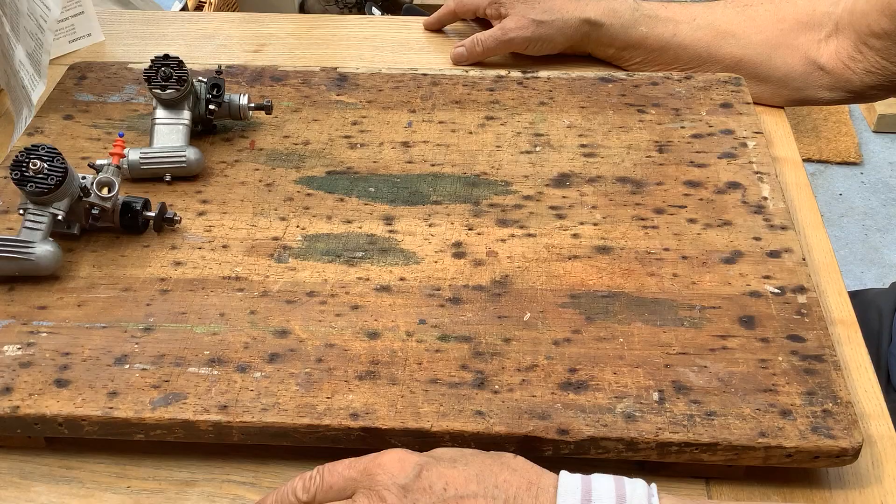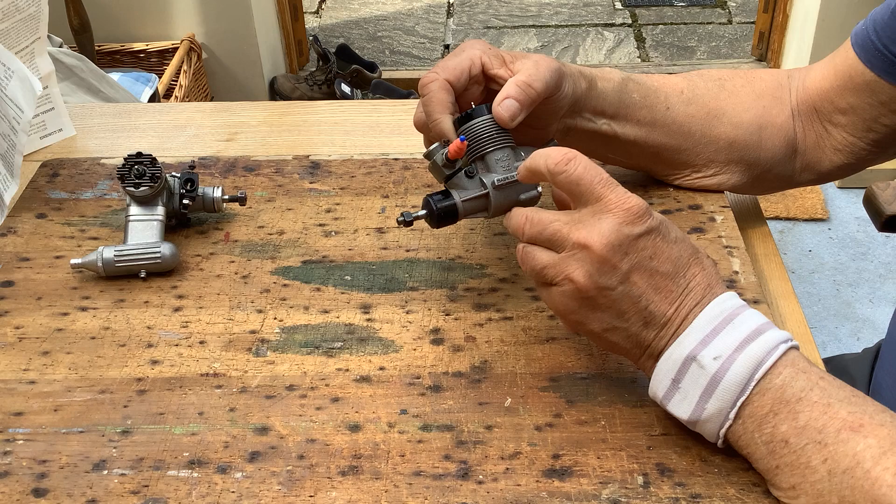First up we have an MDS metal doorstop, MDS 3.5cc, 0.2 cubic inch, made in Russia. Not very fashionable these days. Not much info about these engines in general, and in particular not much about this one. I guess it's Schnuerle ported, double race, big Venturi there, possibly with the original glow plug, which is an idler bar plug, if you can see that.

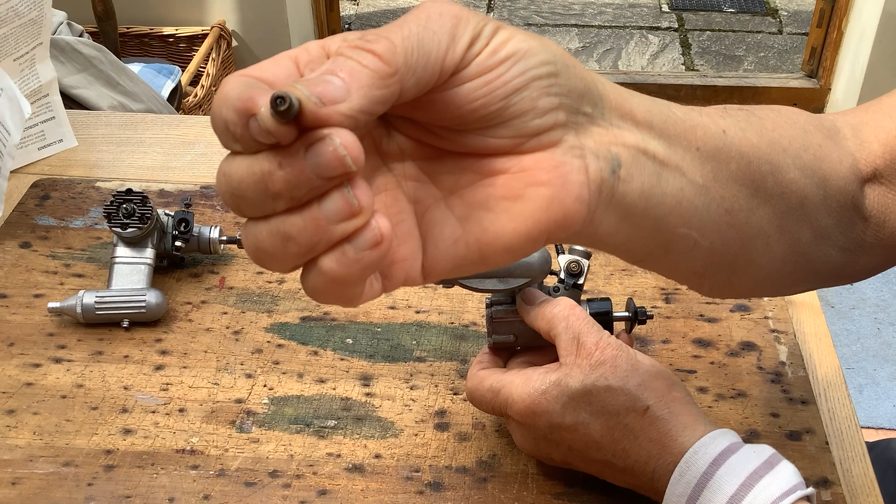No matter. It was a bit of a barn find off the old eBay. Didn't cost very much, and normally for these sorts of engines I would take them to bits and make sure they were clean, no crap inside. This one I couldn't. The cap heads were put on by Ludmilla up in Minsk with a 6-foot bar on her wrench. I think they're absolutely immovable. And I think the back plate, I won't even show you that, it's disgraceful, was put in with a hydraulic press, I think.

The observant amongst you will notice my patented needle valve. It came without one and that bit broke off. So a hat pin and an earplug stuck on there to give it some sort of seal. That pushed in, actually works.

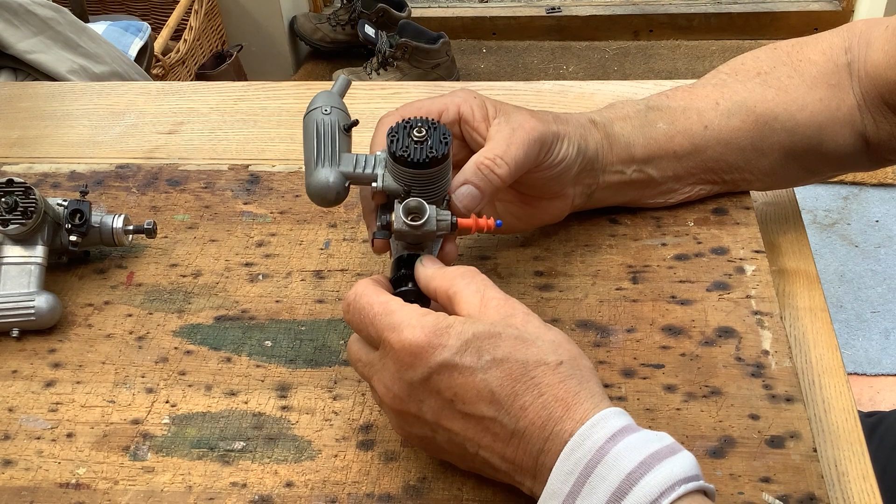It's pretty rich, but that's no bad thing because I think this engine has had very little use. The fits and bearings are very good, and it throttles on that fine, and in general I must be lucky because I've had 2 MDSs now and both of them have been very good, but it's agricultural.

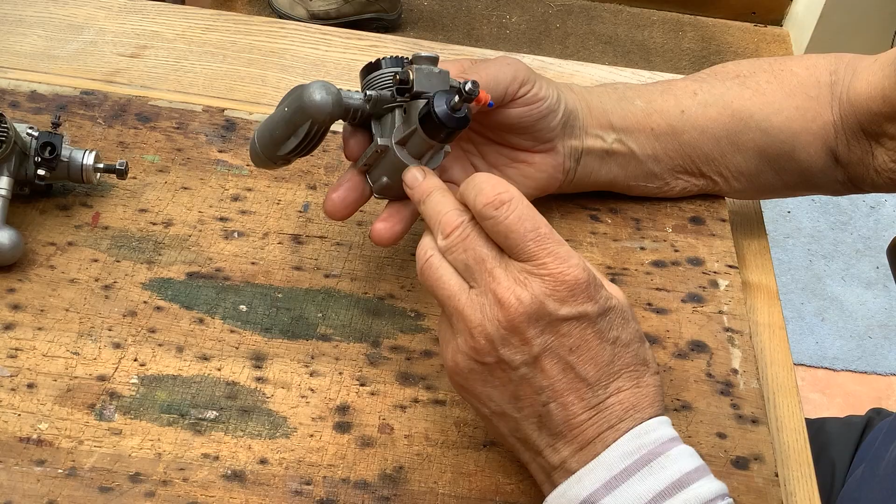I think there was one run on YouTube years ago by Wonderful Cat, and he said it's a bit agricultural but it runs fine, and he put it up for sale. I don't think this is the engine, but you never know. Anyway, let's call that chalk.

Saving the best till last, this is the cheese. It is an HB 25, 0.25 cubic inch, 4 cc's, H, Helmut B. Bernhardt. So this was made in Germany by Helmut Bernhardt, and these engines are quite rare now and very, very well made, I have to say.

Helmut Bernhardt, according to Peter Chinn, made optical instruments and decided to go into model engines, as you do. There is, believe it or not, a video on YouTube if you search for Helmut Bernhardt with a T on the end, and I think his son is fronting the video, and they're actually making orthopedic shoes. So where instruments led to shoes, I do not know, but this company, typical German family firm, employing a few people, started in the 1920s or 30s, I think.

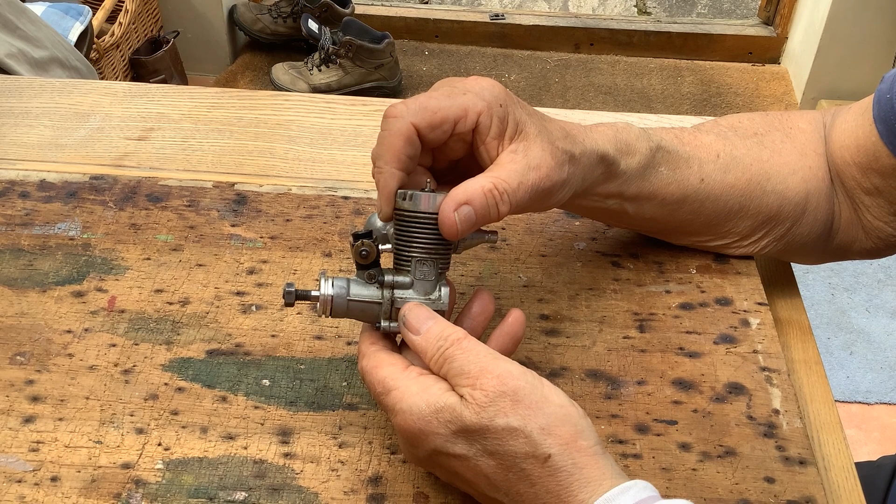Helmut decided to make engines, I think in the 70s, early 70s, and he teamed up with K&B in the States, and the person who makes these carburetors, Perry, and for a while he was making bits for them, and they then made bits for him, and they had something to do with Veco engines. But after that, I think all this is Helmut's make.

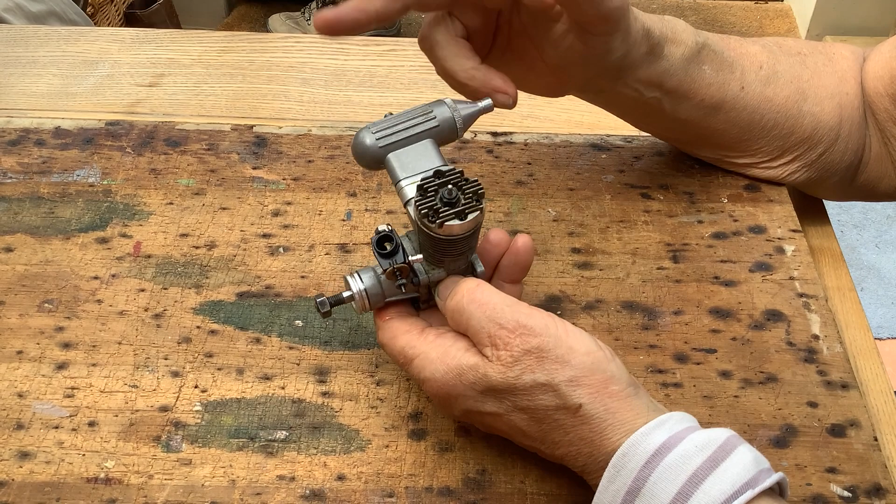This predates Schnuerle porting, so it's conventionally ported, cross-flow scavenging. And there is a review on Sceptre Flight that said this engine put out a surprising amount of power, 0.6 something of a brake horsepower, depending on whether you had this fellow on or not. That's an addition, an extension, so this clears the model that it was in.

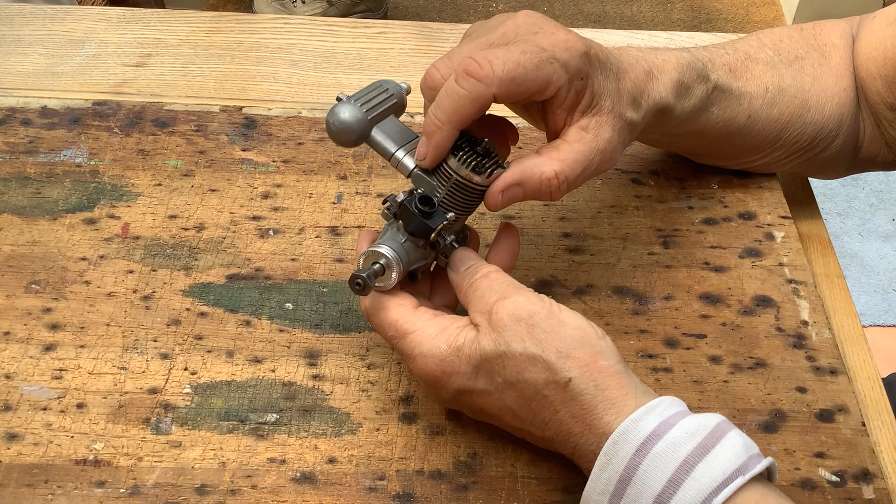It's unusual in there's no back plate. There's also radial mounts. I think there was one under there that's got taken off. So the front comes off, the front housing comes off, and with it the crankshaft just pulls straight out, and the bearings, I think. The fits and finishes, as I said, are superb.

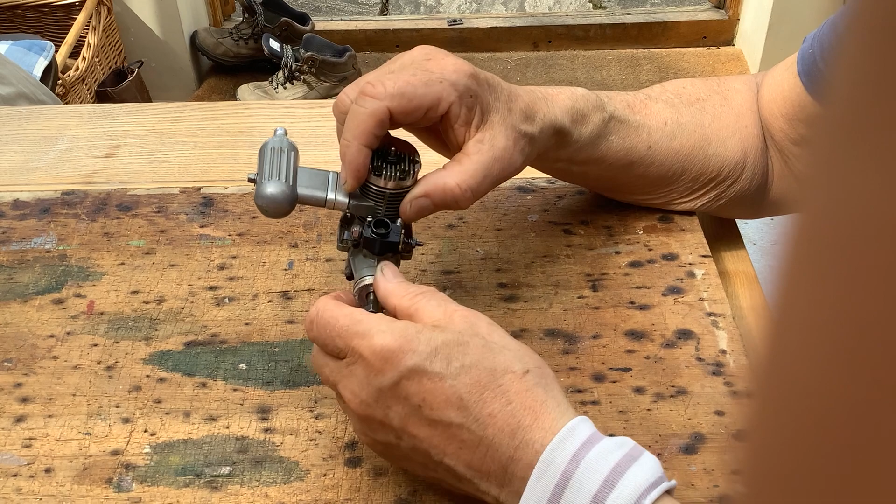This may not be handmade, but it'd be hand finished, I think. And if we're looking at the glow plug, they use K&B plugs, and I have a funny feeling that may well be original, unless it's a new Model Technics or something like that. I don't know. The inside, I haven't looked, but the piston is ringed.

It has a Dykes ring on the piston. So again, best not to take it out because there's swine to get back in. Perry carb, it says they're patented. You can't read it, but I can. Patented, that works very well.

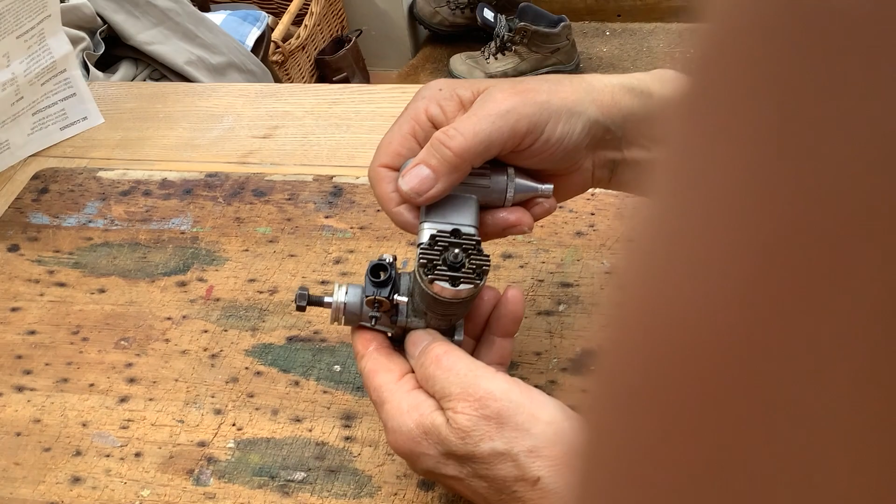This engine came from a very good eBay seller whose father used it, I think from the 80s for flying, and it's been used. And he is now retired. And I got this engine on eBay, and I can tell father that it's in good hands. I will look after it very carefully.

So I think that's all I can tell you about that one, but this really does run, and of course I will show them both.

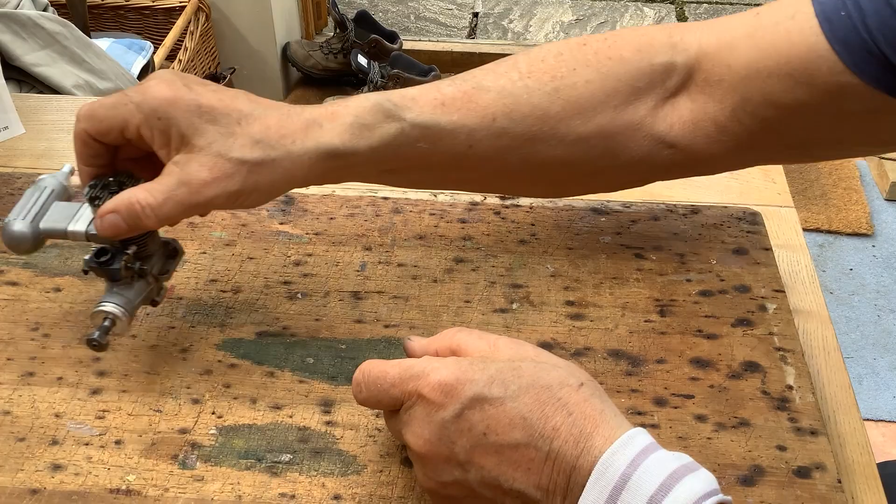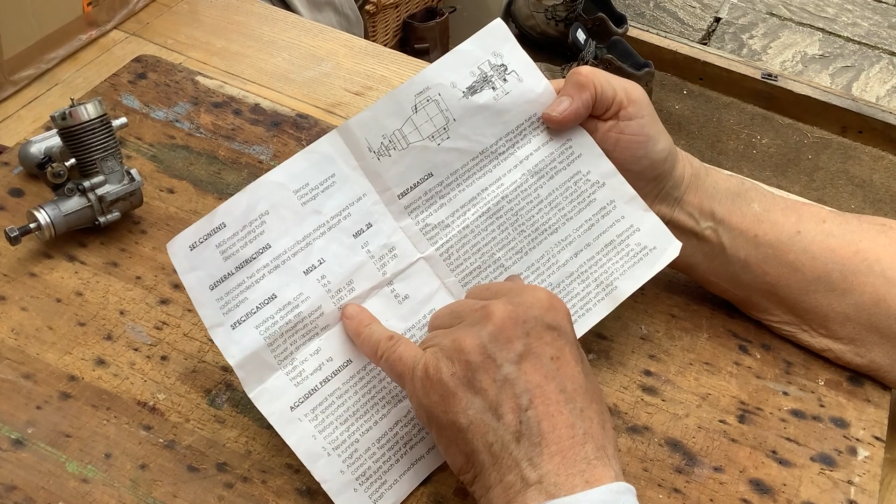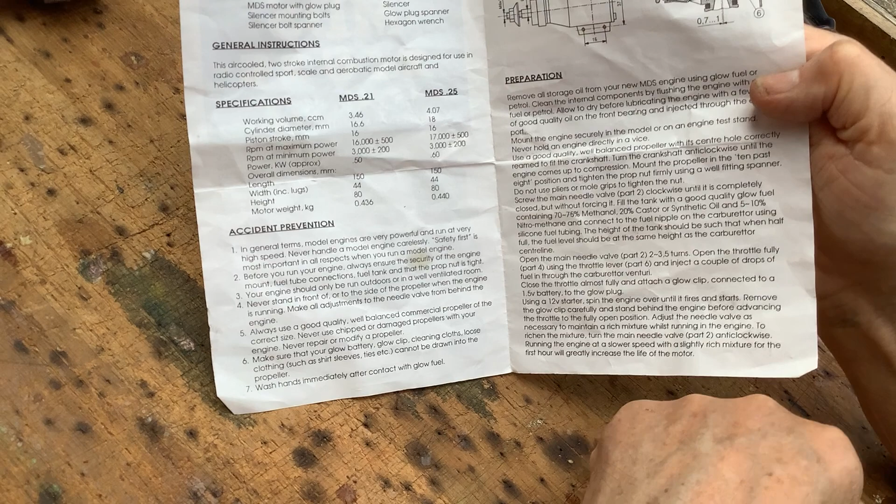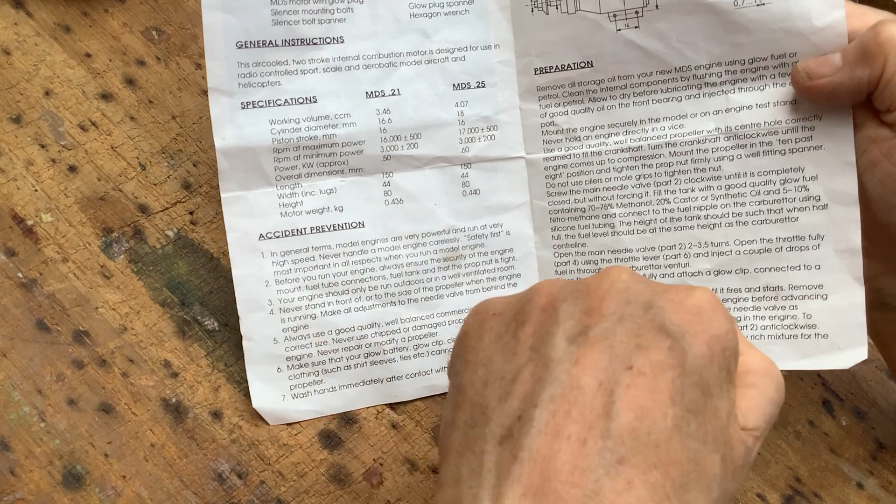it'll go forever. If there's anybody watching who's got a needle valve like that and wants to flog me it, get in touch.